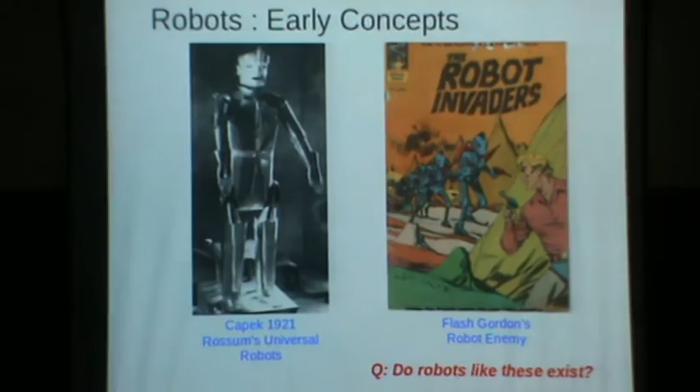That thing that you see on the left looks like a knight in armor - that's the first concept of robot. The term robot arose in a play which was made in 1921, and that costume is what you see there. And when I was young, in school and college, there was this Flash Gordon comics, where this Flash Gordon was a traveler in space, and he had robot enemies and robot friends. And the concept of robot then was very advanced, in the sense a robot was capable of traveling in space, being on planets, acting by itself autonomously, fighting people, fighting men, fighting each other. So it is as far as we can take robotics. But reality, of course, was far away from that.

So just one question, are there robots like that now? Robots, if not fight, at least move around like people and react to stimulus and things like that?

So, yeah, there is a robot called Asimo made by Honda in Japan, which we'll see, that looks very much like a human being. But the key question is not moving like a human being, which also is not easy, but thinking and having intelligence. So have we reached that? That is not easy. Of course, we haven't reached that, obviously, but that is what we are trying to do.

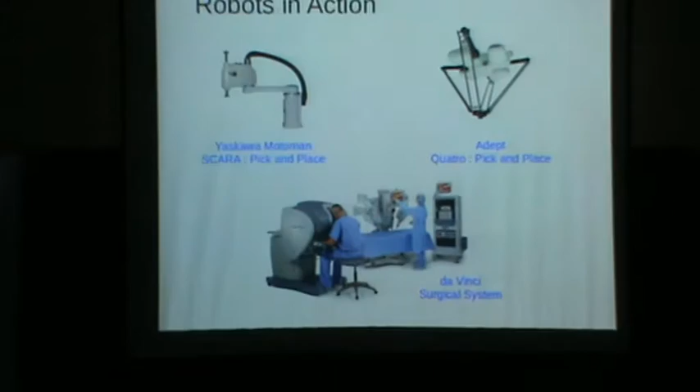But, so let us look at actual robots. So what you see on the left there is what is called a serial chain robot. This is called a Motoman robot. It's a very simple configuration which we will see a little later. We'll see it in action first. I haven't embedded this, so I'll have to play it on one side.

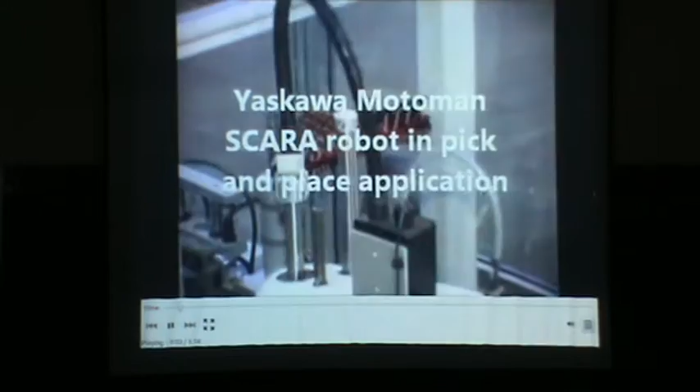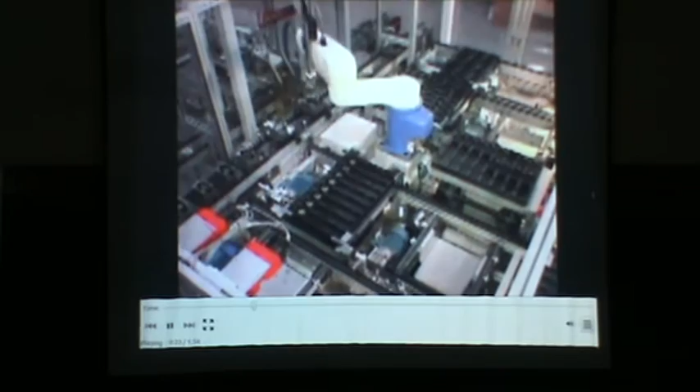So this is a typical operation in a factory floor by a robot. So it is picking up something from a part presenter, and it is placing it on a bin or a pallet. And look at the robot, the mechanism of the robot is what is quite interesting. And it is moving fairly fast. The large motions it has to do is being done fairly fast.

So I just wanted to show you the motion. This particular configuration is called SCARA, which we will see later. So now the one on the right of that is made by a company called Adept. It's called the Quatro, and this also does pick and place. So let us see it doing that pick and place. And the claim is that this was the fastest robot at that particular time when they made the video, which is a few years back.

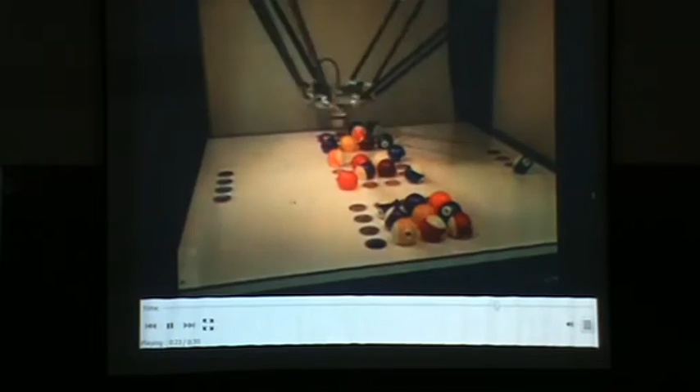So the answer to the question, can a robot do this kind of pick and place as fast as humans can? The answer is very obvious, right? It can do it much, much faster. So we cannot match anywhere near the kind of speed that we saw there.

What is interesting about this robot and the previous one, if you compare, the mechanisms used are very, very different. What we are going to concentrate on in this particular talk are the various mechanisms used in robotics, and you see a very different mechanism here. It's very fast.

Even this particular robot, the Motoman, by itself may not be all that fast, but this company ADEPT was making robots which were very fast right from the beginning. They had robots of the same configuration as the Motoman, which is very, very fast. You can see it on YouTube.

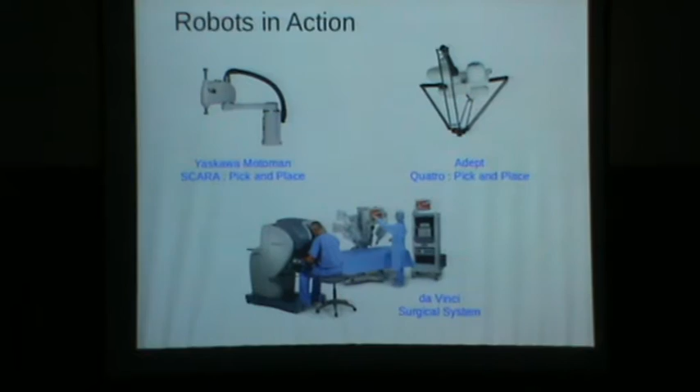The one down here is very, very fascinating. This is really not a robot in that sense. It is a device for helping surgeons do surgery remotely, and much better than what they can do when they do surgery directly. So you see the surgeon sitting on that console.

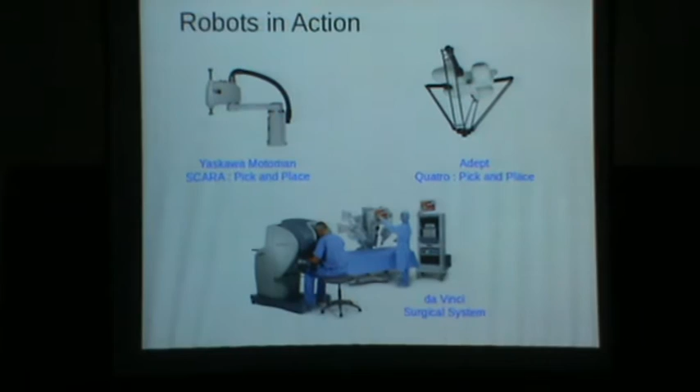He is the surgeon. So the surgeon is sitting there on the console. The robot is here, the patient is lying here. There is an assistant here which is helping out with a few things. The operation is done by the surgeon by moving a few things which we will see in the video, and these arms get inserted into the person and it does the operation.

Okay, so let us see the video there.

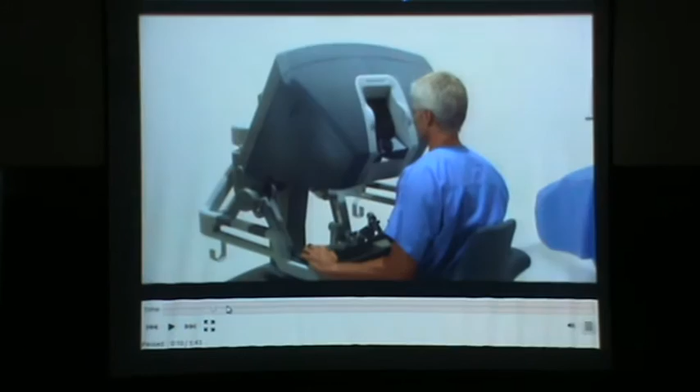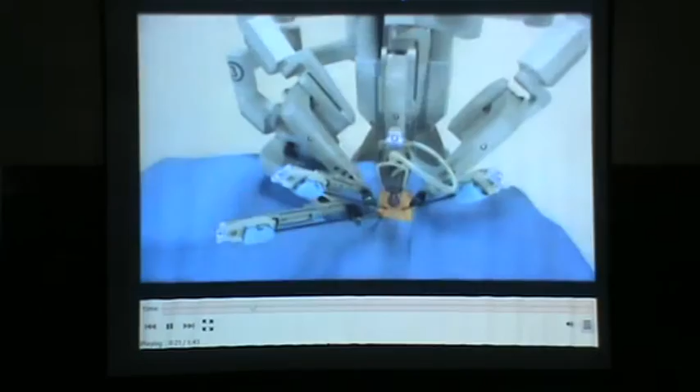This is what the mechanism looks like, something like four arms. This is one of the most important parts, the end effector or the gripper. And the surgeon is manipulating or moving this.

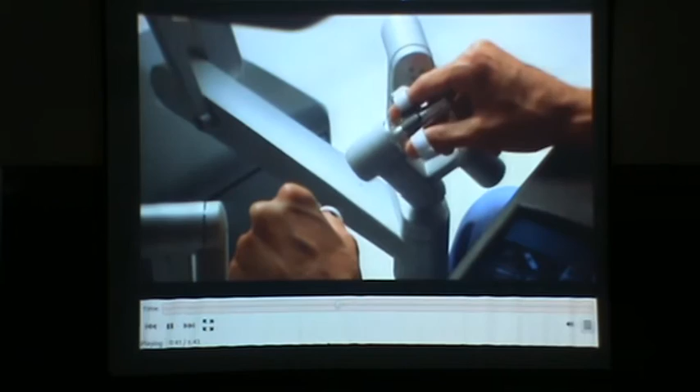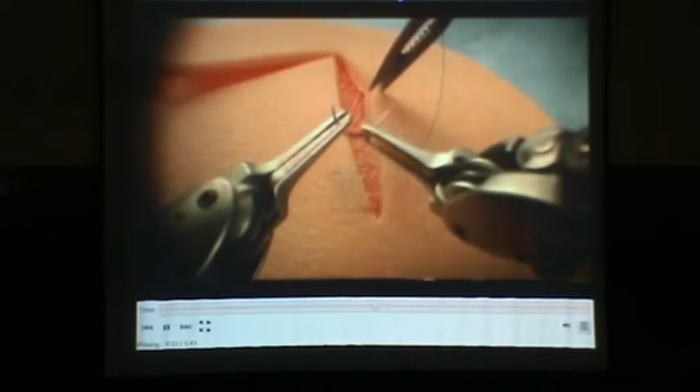So this is called a master-slave configuration, and this is the master at the fingertips of the surgeon. What is being done here is not at all easy to do. It requires a lot of skill.

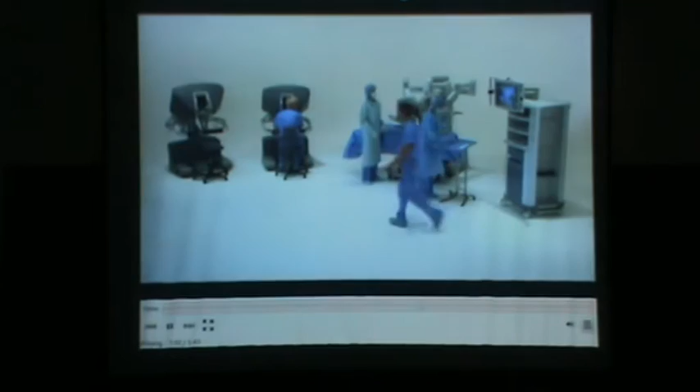This also is called a robot, but this is not exactly a robot. It is entirely controlled by the surgeon. But there are some very interesting things.

One is that this particular surgery doesn't require that kind of fine operation. But if you want to operate on the eye, and if you want to operate on blood vessels which are very fine, the problem is that the typical tremor that we have in our hand is larger than the size of the blood vessel. So how do we operate on something like that?

So what Da Vinci does is that it takes the tremor away. It filters out the noise, takes the tremor as noise, and filters it out. The end effector, the knife and all those things moving there are much more steady than the human hand, although the human hand is controlling it. So this is one very important thing.

The other important thing is that when we do something with our hands, manipulate something, a lot of our ability for doing this comes from the feedback we get through the force feedback. The sense of touch, the forces that we feel in our hand. And if we don't have that, our ability to manipulate will be much lower.

Da Vinci has the ability to give force feedback to the surgeon, but it turns out that many surgeons feel it is not required, because the visual perception they have is so good that they don't feel they need the force feedback. Many of them use it without force feedback, but that is available with Da Vinci.

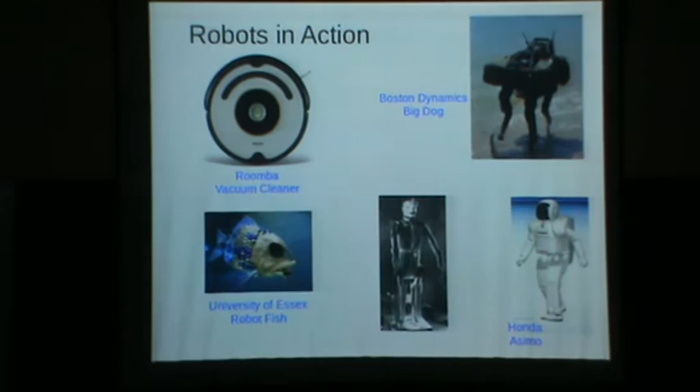The first one you see there is a vacuum cleaner, and the one on the right, called the Big Dog, now it is called something else, was developed by Boston Dynamics for the US Army. What you see there, developed by University of Essex, is a robot fish, and it was mentioned about Asimo, a human-like robot. We'll just see all these briefly.

So you will start seeing a bit of intelligence as these robots operate.

Yeah, there is basically a lot of advertisements. So, yeah, so.

Look at this vacuum cleaner moving. This is autonomous, okay, it's just let free onto the floor. It is moving on a carpet.

So this is an advertisement video, so you see all this.

Now see what it's doing. It has gone under that sofa, and normally we find it difficult to clean below these objects, but this is able to go around and go into very intricate regions and clean.

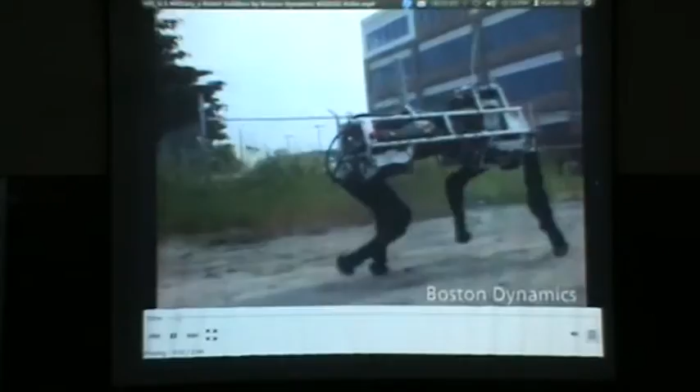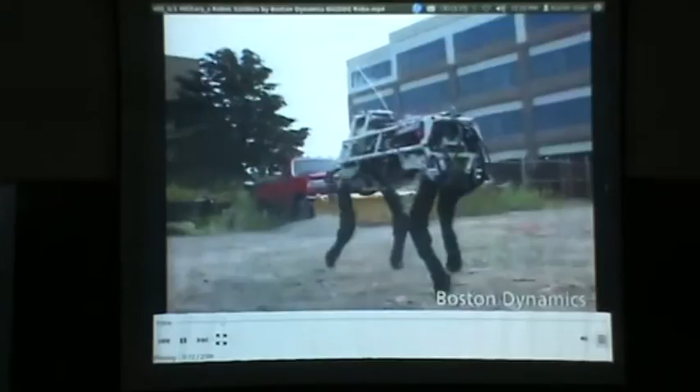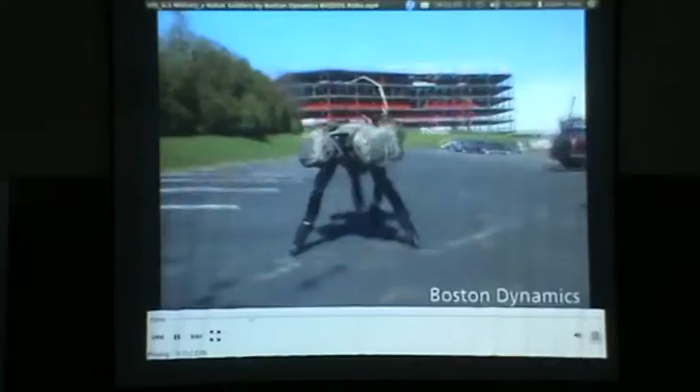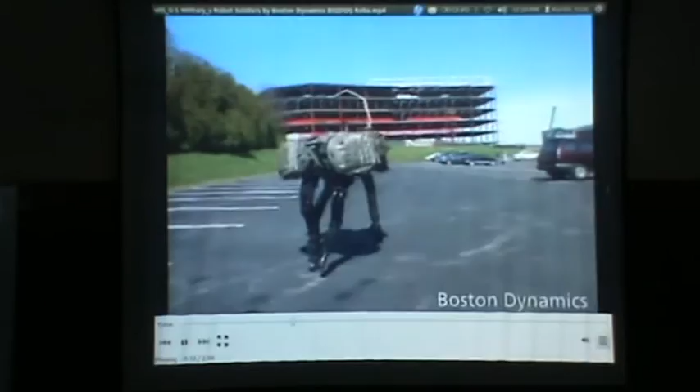Now see what's happening. So that kick is good enough to really fell a person, but this robot has adjusted, and is able to be still stable in spite of that kick. So this works in very different kinds of environments and all that.

Now this robot is quite sinister. It is being developed for the US Army. So who knows? Very soon, this is long back, now these have been developed to a much better level, and very soon human beings may be replaced by these kind of things, which may even carry guns and fight. And not just remotely controlled like that, but autonomous.

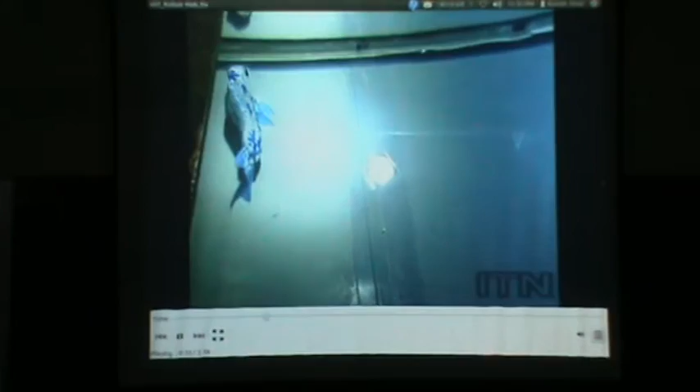Here you have a very fascinating robot, that fish-like thing that you see there. The question is, can it move like a fish? This was developed in University of Essex. So it's out of water, now it has gone into water. See how it moves. Can you really distinguish it from a fish by the motion? It is so gentle, graceful, but for the fancy covering, it would have been just like a fish.

So again, the question here, really relevant for us, is what is the mechanism? We are going to talk about mechanism. I may not get to this, but how do you really build something to give it this kind of motion? So that is the fish, and finally.

ASIMO. The question, have we built robots which can really be like human beings? At least partly we have, or Honda has. So let me show that video. This is the robot coming like an attendant. Let's see what it does.

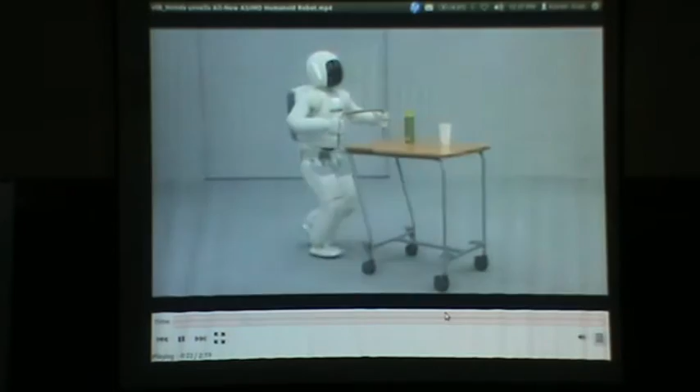Is it being able to walk because of the support coming from the wheeler there, or can it walk by itself? Yeah, it can. It can even run actually. If you look at the YouTube video put out by Honda, you will see this running. So it seems to be looking at this. I really don't know whether it is looking at it, recognizing, deciding what to do, and doing that.

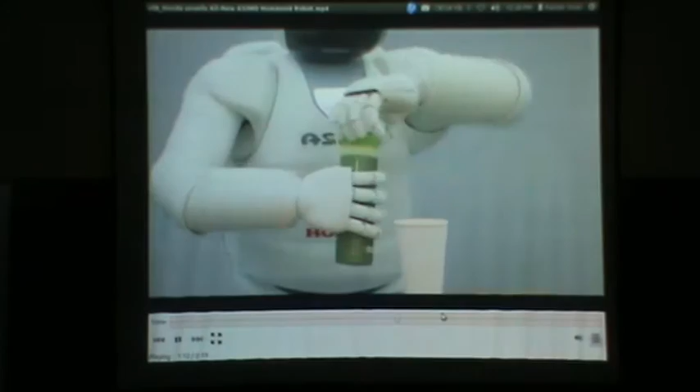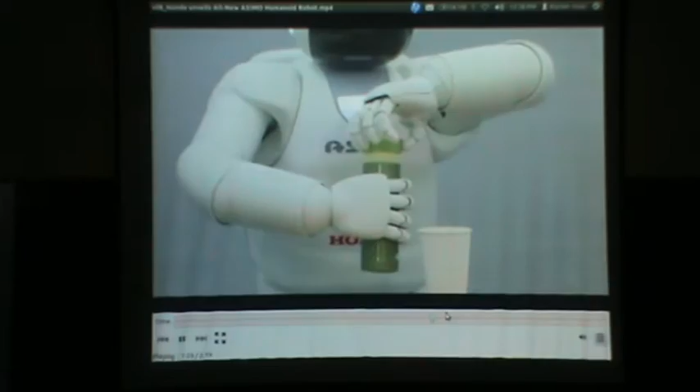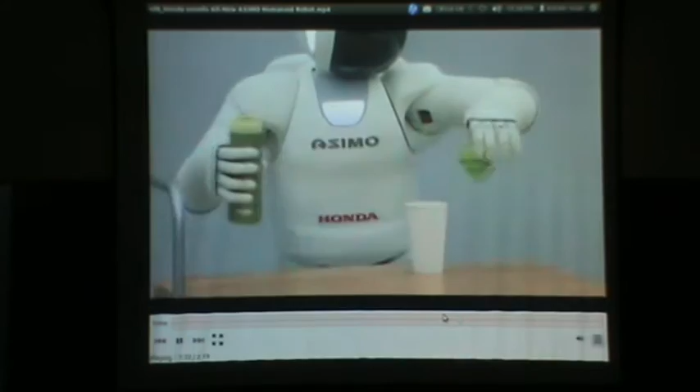The demo of ASIMO I had seen was fully programmed. Yeah, it's unscrewing the top cover. Is it easier to unscrew or screw it in? Which is easier? Unscrewing is much easier. To screw it back on is really tough. But even in unscrewing, you have to have a helical motion.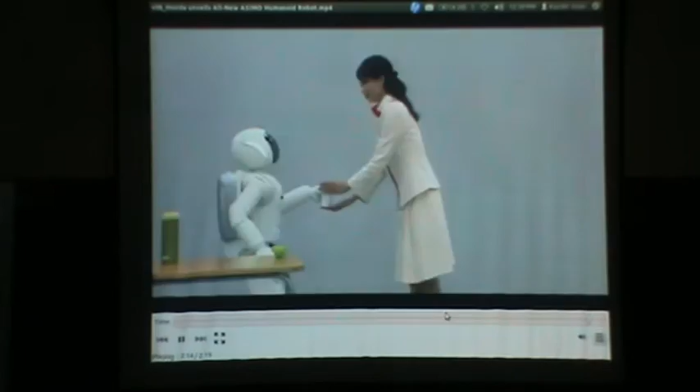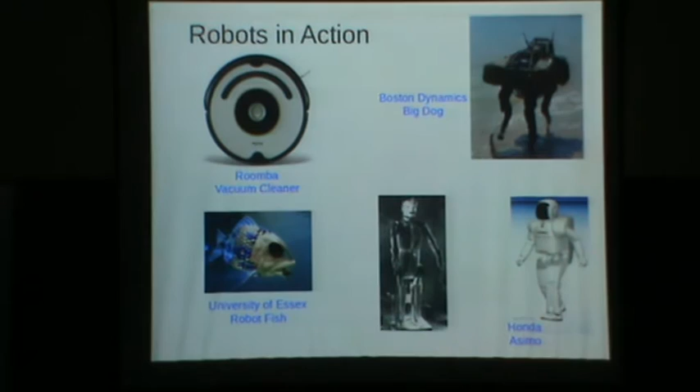So that's it, that is Asimo. It has been under development for a very long time, and of course in some of these things what we are trying to do is mimic nature, and that is actually one of the biggest fountainheads of creativity in engineering. Observing nature and trying to mimic that and develop systems which are, if not as capable, but follow the principles we find in nature. And in robotics also, that is what we do a lot. We try to develop systems which have the kind of principles based on which nature works.

So let us now start looking at robots a little more. What you have is the mechanism of the robot here. This is what we will see in detail. Mainly it is a series of links which move with respect to each other, connected by joints. In order to drive the joints, you need actuators, so there are actuators there, motors and things like that. And typically you need a transmission between the actuator and the joint, so there are transmission elements. Intelligence comes from the fact that it has sensors to understand its own state as well as with respect to environment, and then of course processing of information through controllers like this.

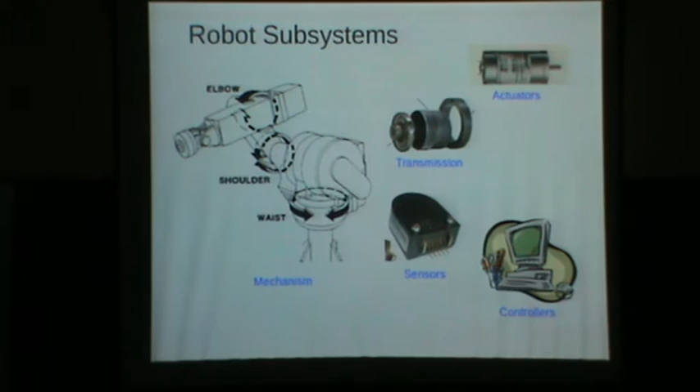So this is typically what a robot consists of, a manipulator consists of. Now what we are going to look at are mechanisms. Mechanisms is basically the skeleton that you see here, and of course transmission elements are also typically mechanisms. This is a gearbox, that is a mechanism. But we are going to look mainly at the skeleton of the robot like this. So basically what the mechanism does is that it enables certain types of motions.

So here, how many are from electrical engineering? Can you raise your hands? So the remaining are from mechanical.

So much of what I am going to tell you or discuss are things mostly known to you, so I wouldn't spend too much time on that. Whatever is important for the electrical engineering students to understand, I will cover.

So, mechanism definition is somewhat like this: a set of rigid or resisting bodies which are interconnected by joints. And through these interconnections, they have relative motion between each other. Typically, one of the bodies is fixed. There can be free-flying mechanisms also, but typically we consider one body to be fixed.

An example is the slider crank, which is the mechanism a typical IC engine is made of. This is the piston which reciprocates, and this is the crank which rotates. There is this connection between the crank and the connecting rod, and the connecting rod between the crank and the piston.

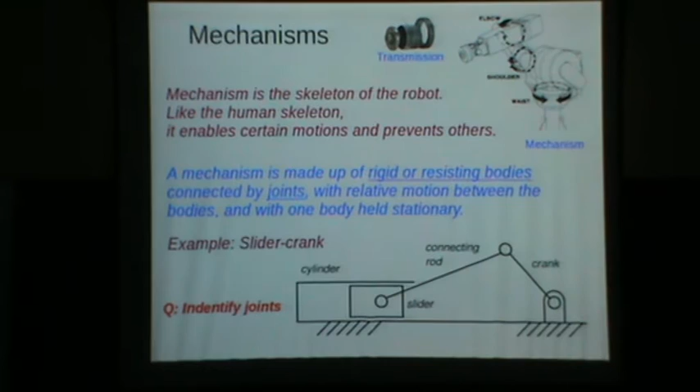If you look at joints conceptually, these sort of give the idea of joints. For example, there is the frame on which this can purely rotate, and that is a revolute joint. And there is this frame on which this can purely translate up and down, because this keyway is here, and this is what is called a prismatic joint.

A combination of this and this, which are interconnected in the sense one is dependent on the other, is a helical joint, or the screw thread is a typical example of that. So these are all 1 degree of freedom joints.

Degree of freedom means... I'll come to degree of freedom a little later, I'll define it later. Now these joints are a little different.

The only thing different between this and these two is that you have really allowed both motions of rotation and translation here, whereas here they are constrained. Here this particular boss constrains translation and the keyway constrains rotation. Both are possible here. This is called a cylindrical joint with 2 degrees of freedom.

And this is a ball and socket joint or a spherical joint, which is actually 3 degrees of freedom. This is like your shoulder. And this kind of joint we don't typically use, it's called a planar joint. It's more only a concept than an actual joint.

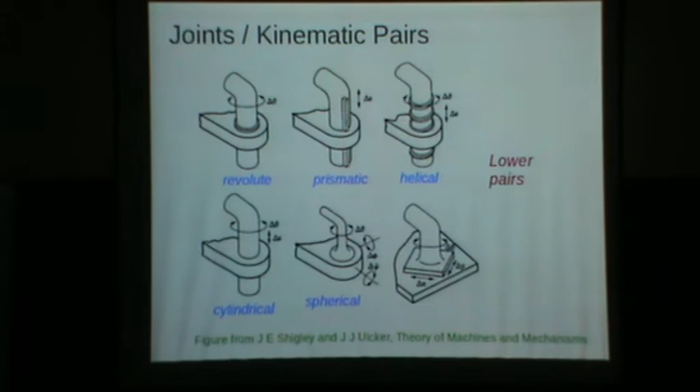So these are more important than the bodies, or the rigid bodies, which they are used to connect. And the type of motion which is enabled is because of the nature of the joints.

Now let us come back to our manipulator. There are different types of manipulators, and we are going to see mainly 2 types: one is called a serial chain and the other is called a parallel chain manipulator. Now the manipulator that you see here is a serial chain.

A serial chain means there is a frame, and the frame is connected to just one link through a joint, and this has to be a 1 degree of freedom joint because of a particular reason, and the second link is connected to the next, and so on, and so you have a serial chain.

So all of you have an example of serial chains, several examples actually. Our arm is a serial chain, that all of you are able to recognize. So let us look at our arm.

What sort of a joint is there between the body and the upper arm? It's a spherical, it's a ball and socket joint. Now, which is the next joint?

So this is the frame, and then your upper arm, that's the next link. Now that is connected to the lower arm. And what is the connection, what is the type of joint? There's a revolute joint.

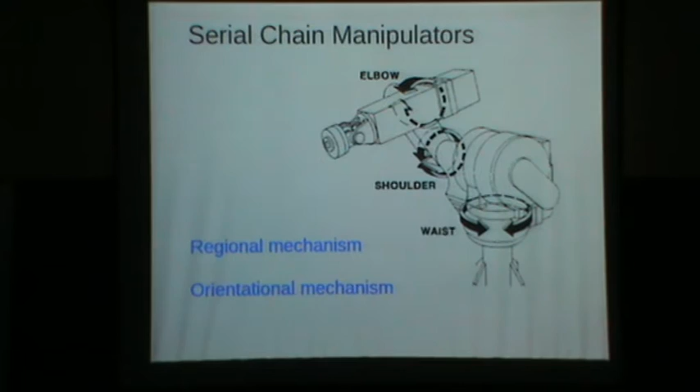So how many degrees of freedom altogether? Degree of freedom is a very crucial concept in robotics or in mechanisms. In very simple terms, I have this arm. If I ask the question, how many actuators, minimum number of actuators are required in order to move my arm in a specific deliberate way? The answer is degrees of freedom, but you have to slightly modify this question, then it becomes degrees of freedom. So broadly this is what it is.

It turns out that our arm up to this fist, including the fist, if I don't consider the fingers, has 7 degrees of freedom: 3 here, 1 here, and 3 here. And the fingers by themselves have 20 degrees of freedom. So altogether our arm has 27 degrees of freedom. A typical robot has 6 degrees of freedom, a typical capable robot. So you can imagine that our arm is significantly more capable as a mechanism compared to a typical manipulator.

Now we are going to see the first 3 joints of a manipulator and separate it out from the last 3 joints, because in a serial chain manipulator, the first 3 joints are there in order to make the wrist move in 3D space, in a region. It traces out a region, and the first 3 joints does that, not necessarily in all cases but typically. So there are 2 parts to a serial chain robot. One is called the regional mechanism, which gives the ability to move in a region. The other is called the orientational mechanism, which is used to orient the end effector or the fist in various ways. So it is split into 2.

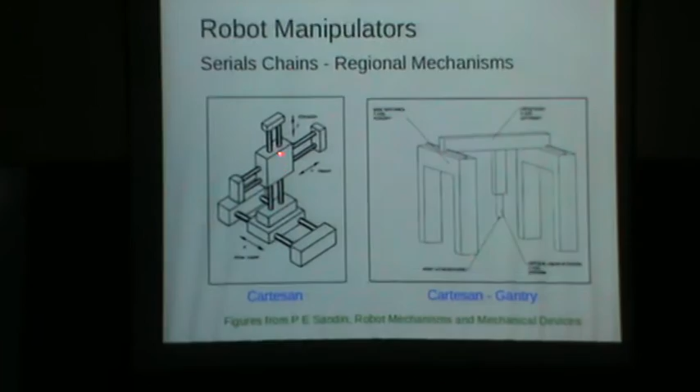We are first going to see regional mechanisms, basically the first 3 joints or the first 4 links. So what you see here is the most common type of regional mechanism. There is the base. This moves with respect to the base in this direction. And then there are these things here. So this moves up and down with respect to the second link, which is this. And this moves to and fro with respect to that, in this direction.

All these are implemented through what are called slider joints or prismatic joints. So this can only translate in this direction, this can only translate with respect to this in this direction, and this can only translate in this direction with respect to this. But because they are connected in series, if you look at a point like this, this can make translatory motions which are 3-dimensional. So this particular point typically can reach within a rectangular workspace. You can attach a wrist here and a hand here, then it becomes a full robot. This is a typical example of that.

So this is what is called a gantry configuration. You have seen gantry cranes. This is a typical configuration of gantry cranes.

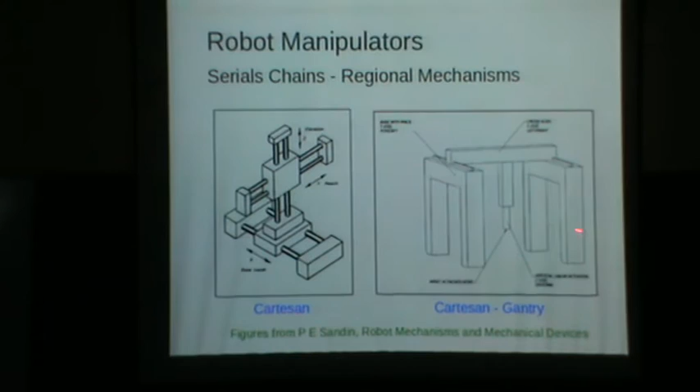Now a little more complex, still not all that complex. You introduce one revolute joint at the base here, which allows this to rotate. Otherwise there are just 2 prismatic pairs, one which allows this to move up and down, and this can slide like this. Now if you ask, what kind of region can this particular point reach? Because these 2 joints are there, if you lock this, it can reach within a plane, a rectangular planar region, and this rotates the rectangular planar region about this axis. Because of that, it forms an annular cylindrical region. So this is called a cylindrical robot because of that.

Now the first robot which you saw working has this particular configuration.

Where the base can move up and down. So on the base, the first link can move up and down. There is a revolute joint here, so this link can rotate, and there is another revolute joint, so this link can rotate with respect to this. So two revolute joints and one prismatic joint.

Again, if you ask what is the region that this end can reach, it turns out to be the annulus of a cylinder. If you lock the up and down motion and look at the region this can reach, it's the annulus of a circle, or a disc with a hollow region inside. This actually moves it up and down, so it becomes a full cylinder.

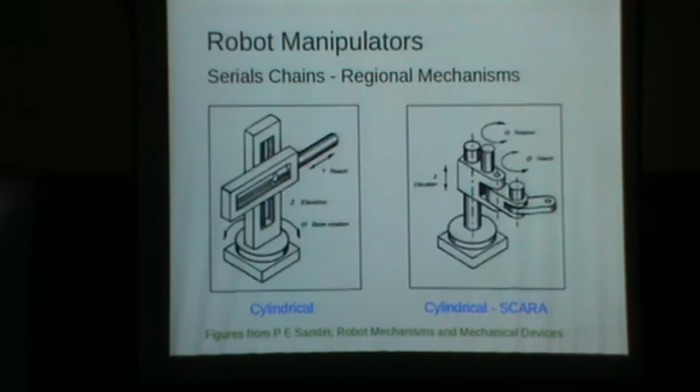There are two more configurations here. This one has a base rotation like this, and a further rotation about a horizontal axis, and then there is a prismatic joint, a telescopic joint like this. So this can move in and out, and this particular point can reach anywhere within an annulus of a sphere. Because of that, this is called a spherical configuration.

There is another spherical configuration, and this is pretty similar to our arm. There is a shoulder joint where there is this rotation as well as this rotation. Our shoulder has one more. This is two here, and then there is this thing like our upper arm, and this like our lower arm, and there is a further revolute joint here.

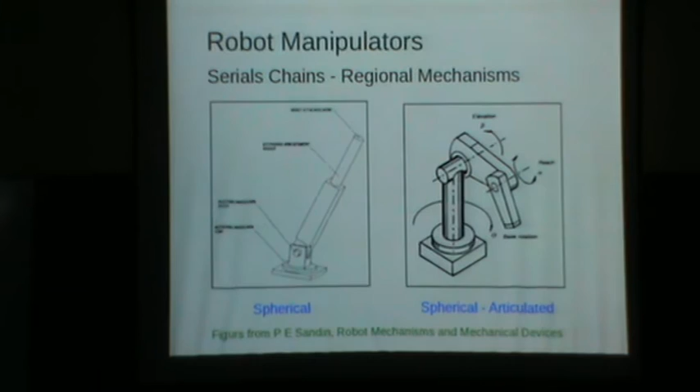So three revolute joints. This is the first time out of all the configurations that has only revolute joints, and this also has a spherical region which can be worked out. This is called articulated because it has only revolute joints. So these are typical configurations of regional mechanisms of serial chain robots.

At the end of this, you have the orientational mechanism, and this is one of the most well known kinds, though not the best known. There is another called a Bendix wrist, a very interesting mechanism made with bevel gears. This one is a little different, but it will serve the purpose.

This is the lower arm. There is a revolute joint like this about which this can rotate, and then another revolute joint perpendicular to this, about which this can rotate, and finally another revolute joint which enables this to rotate about this axis. So there are three revolute joints, somewhat similar to our wrist.

But this does have a problem. If we put it in a robot, the calculations we are going to see in the afternoon become really difficult. But this is nevertheless a typical wrist. It's shown sitting here, and I think what is shown here is the Bendix wrist, which is different. So this is a typical wrist. I said this is a concurrent wrist - actually it's not. I was wrong in saying that. This is the concurrent wrist. Concurrent means the last three axes of the revolute joints intersect each other at a fixed point.

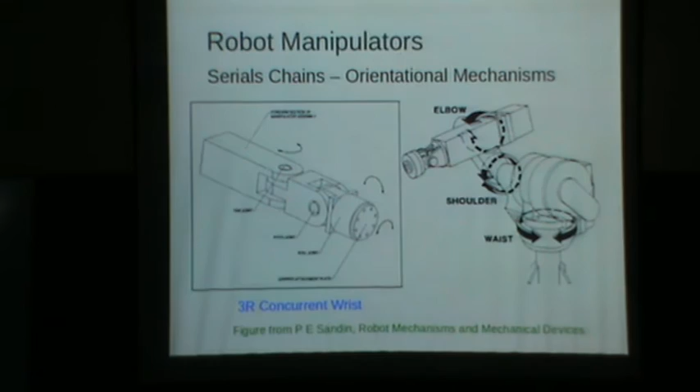Now there is another mechanism in the robot which is very important, the last part, the gripper. You see three very simple grippers here. This gripper can close like this, whereas this can translate like this using a very simple prismatic joint. This translates using a different kind of mechanism. But the most capable one is this.

This is almost like the human hand, with several degrees of freedom, most of them independently controlled. Our hand, although we can independently control the various joints, only a very capable person can do it well. Most of us don't develop the independent motions very well - we don't need to in normal operation, so we don't develop it, but we can control it independently. This gripper is capable of being controlled independently.

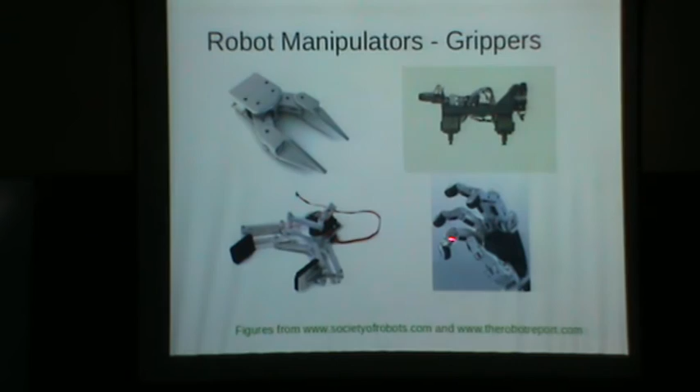Okay, so now let us come to the parallel manipulators. What you see here is not a mechanism with links in series. This is exactly what you saw doing that pick and place of balls very fast. It is called the quattro, and there are 4 arms here which move independently in order to make this move.

So if you simply interconnect mechanisms like this, links like this, will it have motion, particularly the kind of motion we want to give it, is a very important question when you try to design something. And that is actually the question which is answered by the concept of degrees of freedom. I just want to introduce that here.

So the real question is this: how many independent inputs? Earlier I said how many actuators. Actuators, the input is force, but here we have to go away from force and consider motion as input. So we are looking at kinematic inputs. How many independent kinematic inputs are required to move a mechanism in a determinable way, in a well-defined way, so that nothing remains loose to move by itself without our control. So everything moves in a well-determined way. The answer to this is degrees of freedom.

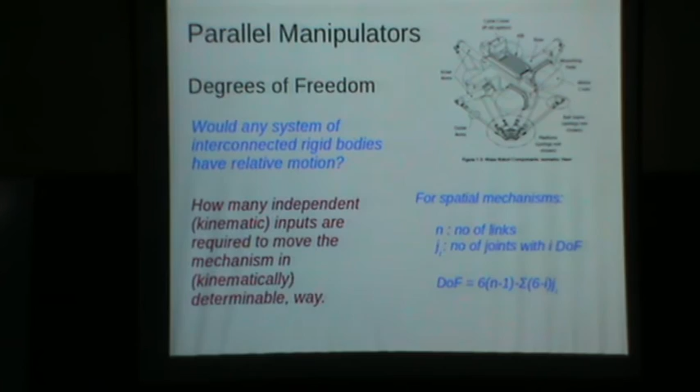So let us see an example, but let me first describe this particular parallel manipulator. This is a very simple schematic sketch of a very capable configuration of a fully parallel manipulator. The configuration is very simple. There is a base which is fixed and there is an end link, which is what we want to move. Now look at one arm which is connected between the base and the end link. You have this particular link which has a cylinder, and then there is a piston here connected to this link. The cylinder, let's assume for the moment, is connected to the base through a spherical pair, and the piston is connected to the end link through a spherical pair. There are 6 such arms, identical, positioned at various different points.

Now if you work out the degrees of freedom of this particular mechanism, there are 14 links and there are 6 joints with 1 degree of freedom - those are the prismatic pairs here. There are 12 joints with 3 degrees of freedom: 3 degrees of freedom here, 6 like that on the base, 3 degrees of freedom here, and 6 like that on the end effector. The degrees of freedom turns out to be 12, whereas this particular end effector needs to have only 6 degrees of freedom. It can have only 6 degrees of freedom, you cannot have really more than that. Whereas this total mechanism has 12 degrees of freedom.

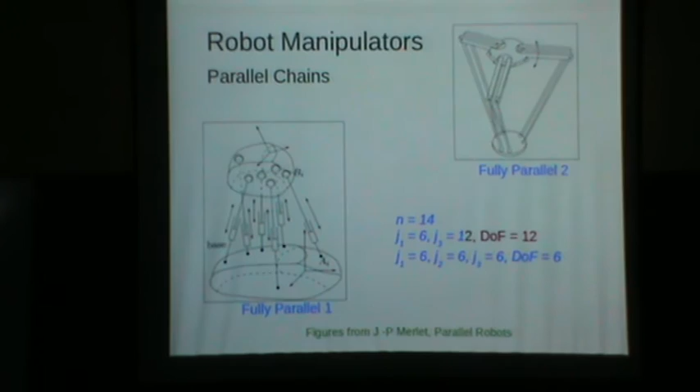There are other very interesting parallel mechanisms. This is called a delta manipulator. It is a very funny configuration. I wouldn't go into the details of this now, but if you count things, it turns out to have minus 9 degrees of freedom, which means that it cannot move, but it actually has 3 degrees of freedom. The 3 degrees of freedom turns out to be pure translation of the end effector. It cannot rotate at all, it can only translate. This is again something you can work out, the fact that it has actually 3 degrees of freedom.

And again, if you put this particular gripper here, and if you want to rotate it about this longitudinal axis, this cannot do it. Instead, you can put a motor here and supply a transmission to rotate that, and that is what is done here. This is called the FlexPicker, with 4 degrees of freedom.

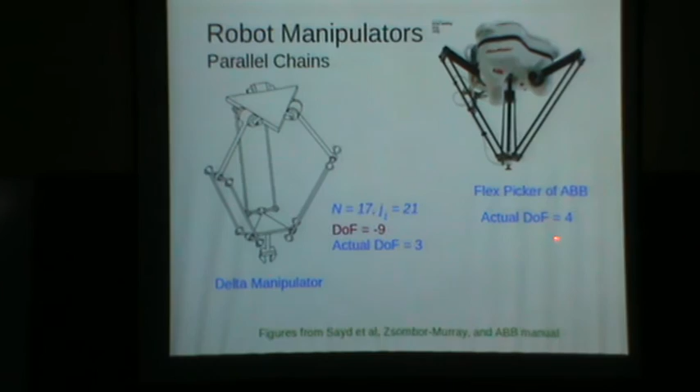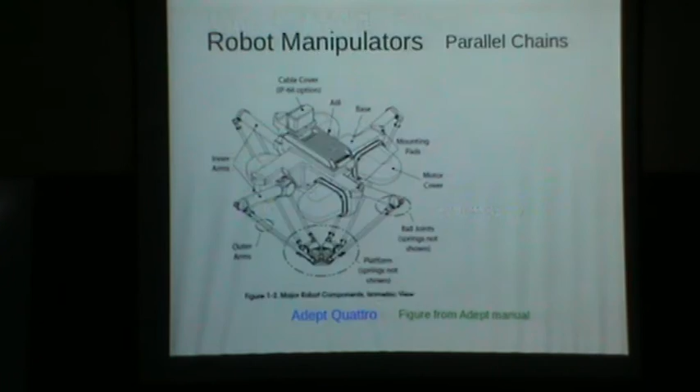Let me now come to wheel robots. These 2 are very common configurations, almost all of you have seen this. Both are tricycles. This has 2 degrees of freedom, both have 2 degrees of freedom. This is both driven as well as steered by this wheel, so these 2 wheels are passive. So this has 2 degrees of freedom.

Whereas in this particular case, these are the active wheels. There are 2 independent motors here. This is a passive spherical kind of wheel, it can be a caster wheel or a sphere. And these can be independently driven. Now one problem with this is that it cannot move in any fashion that you want it to move. This can only move by rotating about a point which is on this axis, and it also instantaneously has to rotate about a point on this axis, unless you allow sliding. If you don't allow sliding, it can only do that.